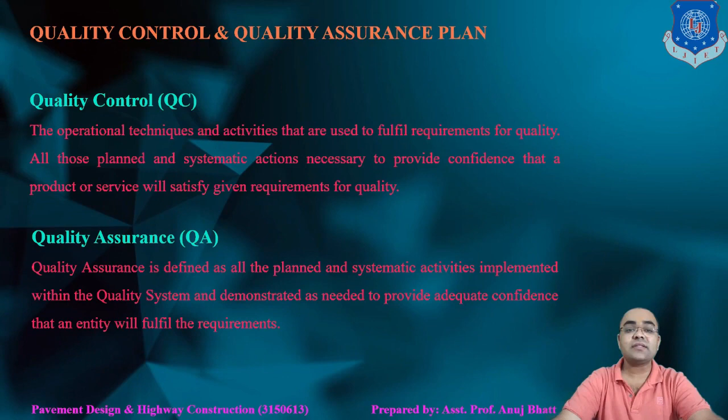Now next we will discuss what is a quality assurance plan. The quality assurance plan is the methodology selected for ensuring that the project incorporates all the elements needed for the successful design, construction and maintenance of a project.

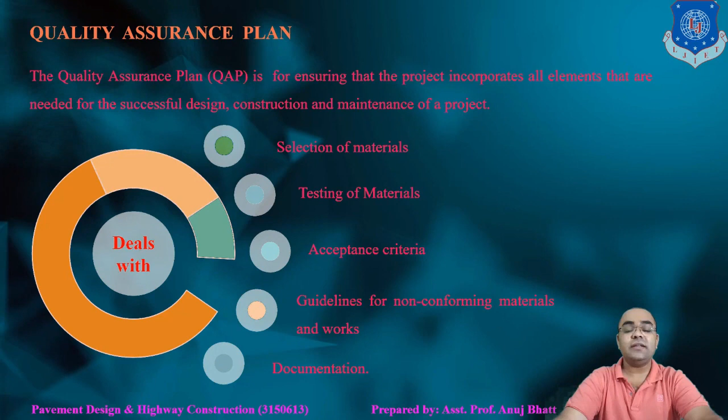The quality assurance plan should deal with the following aspects: selection of material, testing of material, acceptance criteria, guidelines for non-conforming material and works, and lastly, documentation. So let's start with the selection of material, or we can say the sampling of material.

The selection of the material: all construction materials to be used in the permanent works are to be sampled jointly by the consultant and the contractor, prior to the commencement of work. This includes sampling of materials to be tested for proposing approval of the material source, as well as sampling of material for approval of individual construction materials.

In both cases, the contractor must give notification of a request for such sampling to the consultant in advance, and for the sampling activities the consultant is to be represented by the material engineer. All sampling is to be carried out in accordance with instructions given by the consultant, and sampling procedures are to be followed as per recognized guidelines for the particular construction work.

Now these steps, when selecting the materials, include the following: first, the sample obtained has to be from at least 3 different areas. The second thing is ensuring that the sampled material and the location are typical for the material to be tested.

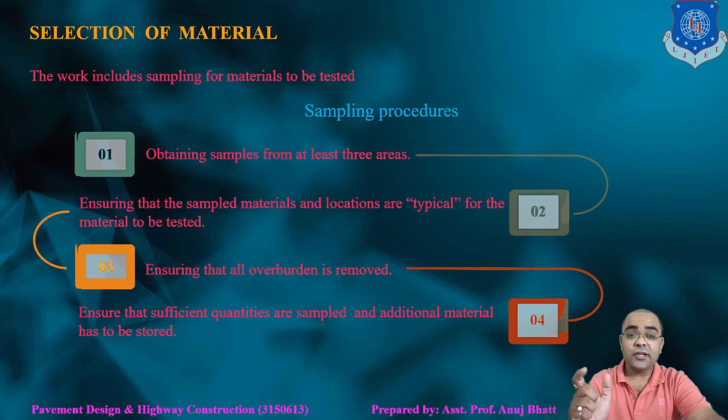The fourth point is that sufficient quantities are sampled to enable all tests to be conducted, plus additional material stored for subsequent testing if necessary. This point ensures that the engineer secures sufficient quantities sampled for that particular work.

Next, the engineer has to ensure that each sample bag is marked or labeled both inside and outside, giving the sample number, material type, sample location, date and number of the bag, as well as any additional information instructed by the engineer. The label has to be kept so the engineer can recognize which material has which characteristics.

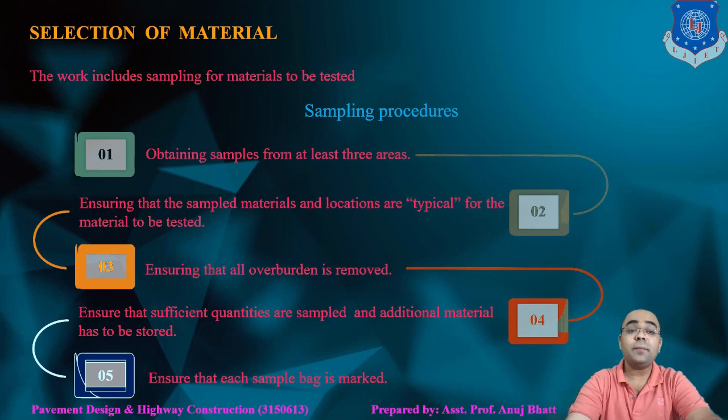So these are the steps to be kept while sampling or selecting the particular material. The next step is testing of material.

It is the responsibility of the contractor to ensure that the laboratory is properly protected at all times of the day and night. It has to be daily cleaned and properly maintained.

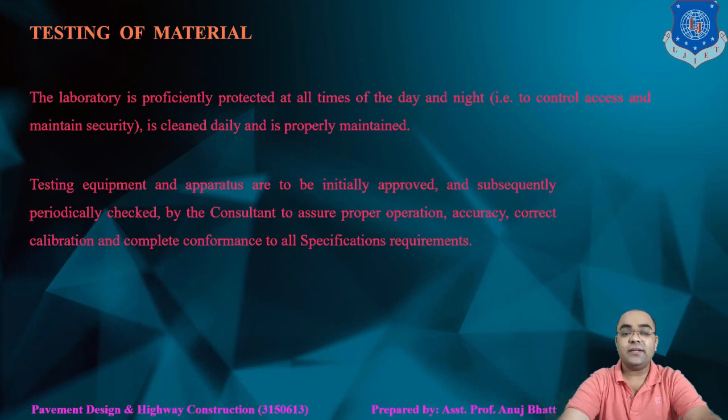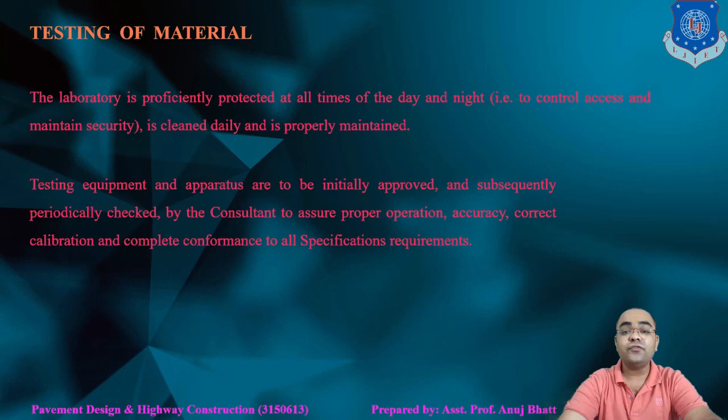The testing equipment and apparatus are to be initially approved and subsequently periodically checked by the consultant to assure proper operation, accuracy, correct calibration and complete conformance to all specification requirements.

The consultant is to supervise, monitor and check all aspects of the testing procedure, including sample storage, preparation, testing, analysis and reporting of testing results. So this is all about the testing of materials.

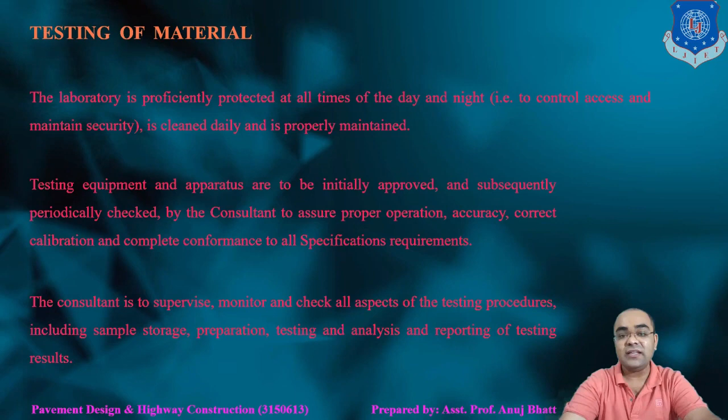The next step is acceptance criteria. After selecting the material, the engineer has to test that particular material, and then some acceptance criteria has to be followed. In the acceptance criteria, all materials included in the construction works for which quality control tests are specified, and for which approval by the engineer has been previously given, are to be inspected and checked for acceptability in accordance with the specification requirements.

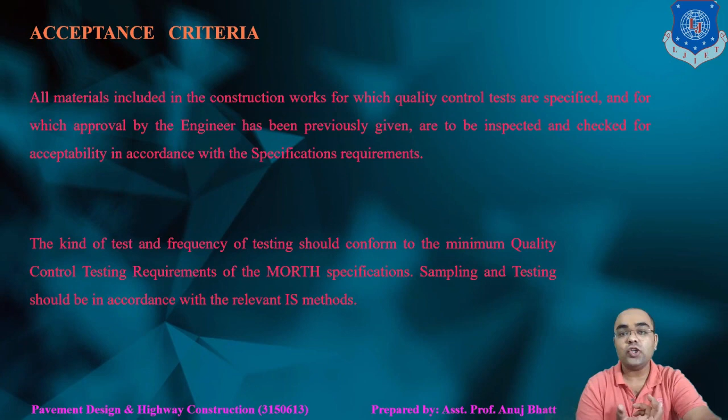The kind of tests and frequency of testing should conform to the minimum quality control testing requirements of the MORTH specification. Sampling and testing should be in accordance with the relevant IS methods. This term, acceptance criteria, indicates how much testing you have to perform on a particular material, which tests to perform, and what should be the criteria for those tests, as per IS methods and MORTH specifications.

The next topic is guidelines for non-conforming material and works. It is necessary that materials and workmanship conform with the contract requirements, and ideally non-conforming work shall be rejected. Whenever the work falls short of the requirement, the matter shall also be brought to the notice of the employer.

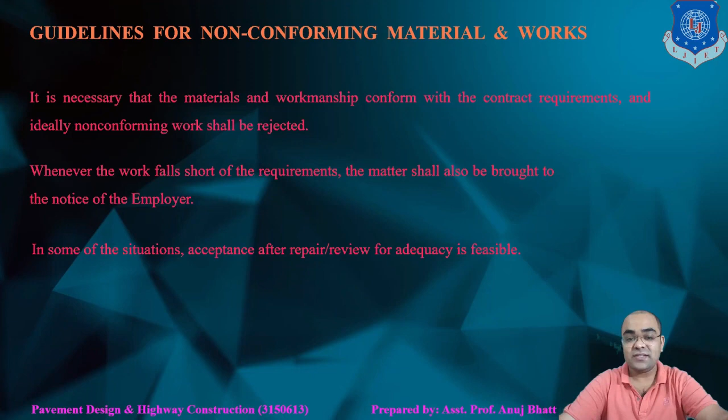But in some special cases, such as concrete, the non-conformance may only be known after a few days of test results. In such cases, the work has already progressed further, so acceptance after repair, or review for adequacy, is feasible. Therefore, separate procedures are laid out for some non-conforming situations.

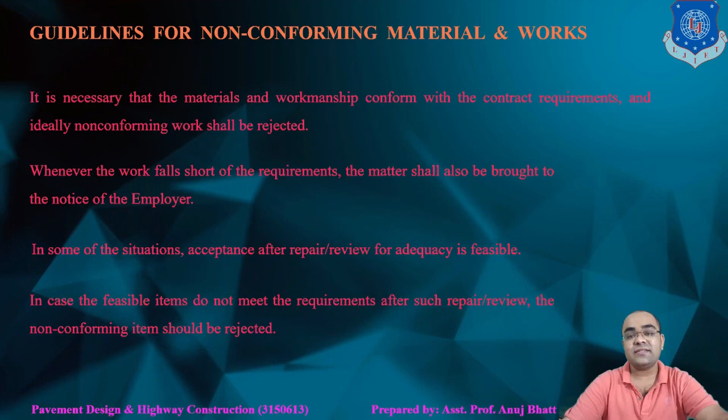In case the feasible items do not meet the requirements after such repair or review, or maintenance work, the non-conforming item should be rejected. It is also necessary to refer to head office or the designer in certain cases of non-conformance to seek their advice and guidance. After following all this procedure...

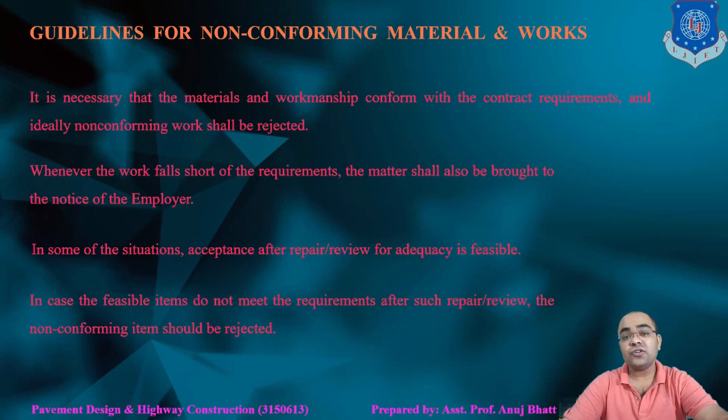Next, the site engineer, or supervisor, has to submit documentation of the particular project. Upon completion of each contract section, several documents have to be prepared and submitted to the employer. The following should be checked with the employer as the project nears completion.

The first things are the as-built drawings, the final takeoff quantities and amounts, contract documentation, and the final completion reports. Although these final documents are to be submitted at the end of the contract section, they have to be prepared as work progresses and finalized as the work nears the completion point.

So this is all about the quality assurance plan. To complete the project as per the required quality, such a plan has to be performed. Now, the next topic we will discuss is bituminous volumetrics.

The properties of bituminous mix include the theoretical specific gravity, the bulk specific gravity of the bituminous mix, the percent of air voids, the percentage volume of bitumen, the percentage voids in mineral aggregate, and the percentage voids filled with bituminous binder material. These are the terminologies from the bituminous volumetrics concept.

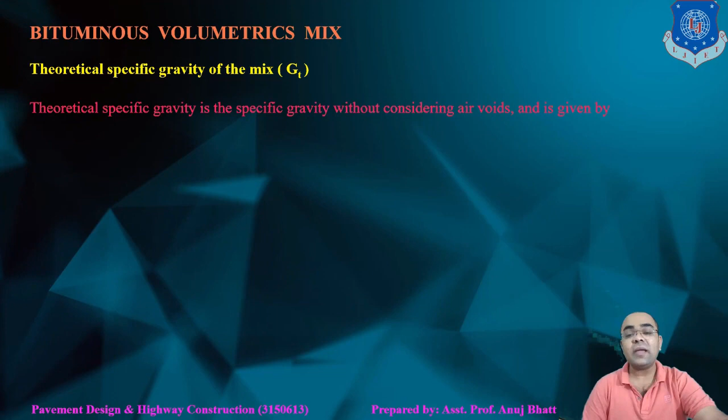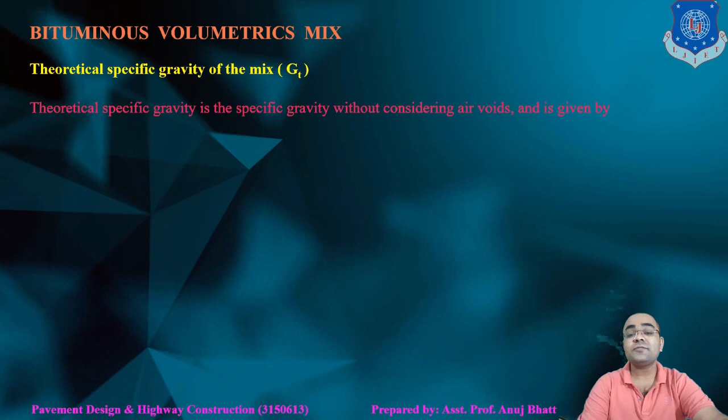Let's first discuss the theoretical specific gravity of the mix. The theoretical maximum specific gravity of a mixture is the specific gravity excluding the air voids. Thus, theoretically, if all the air voids were eliminated from the mixed sample, the combined specific gravity of the remaining aggregate and bituminous binder would be the theoretical maximum specific gravity.

The theoretical specific gravity is given by the equation: GT, the notation for theoretical specific gravity, equals W1 plus W2 plus W3 plus W4, all divided by W1 upon G1 plus W2 upon G2 plus W3 upon G3 plus W4 upon G4, wherein W4 and G4 are also notified as WB and GB.

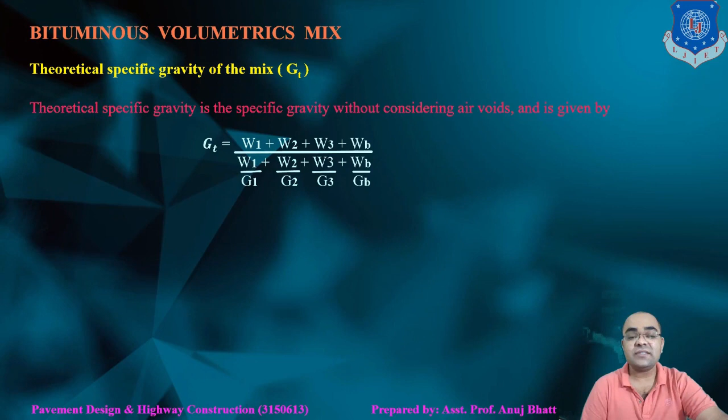Now what does all this terminology mean? Here, W1 is the weight of coarse aggregate in the total mix. W2 is the weight of fine aggregate in the total mix. W3 is the weight of filler in the total mix, and WB or W4 is the weight of bitumen in the total mix. Above all are aggregate and mix weights, and this last one is particularly for bitumen. So W stands for weight, where G stands for the specific gravity of that particular material.

G1 is the apparent specific gravity of the coarse aggregate, G2 is the same for fine aggregates, G3 is the apparent specific gravity of the filler, and G4 or GB is the apparent specific gravity of the bitumen binder. So this is all about the theoretical specific gravity of the mix.

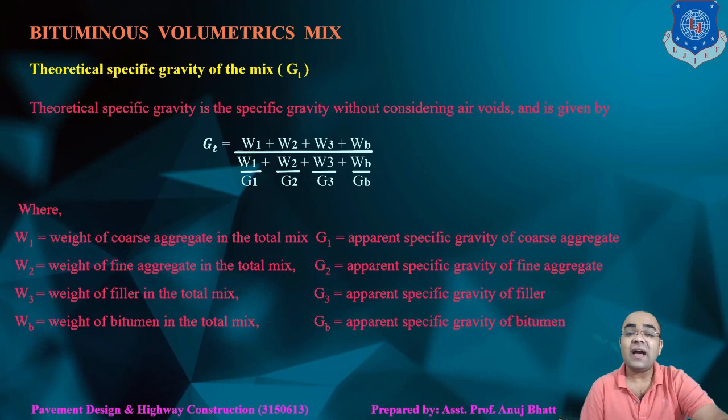The next terminology is the bulk specific gravity of the compacted asphalt, or the bulk specific gravity of the particular mix, notified as GM. It is the ratio of the mass in air of a unit volume of a permeable material at a stated temperature to the mass in air of an equal volume of water at a particular stated temperature.

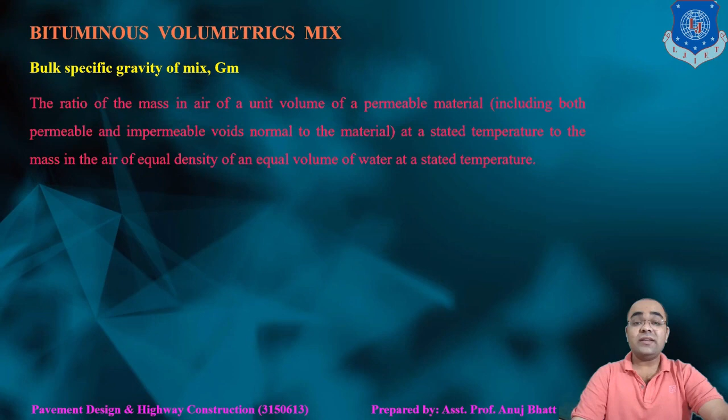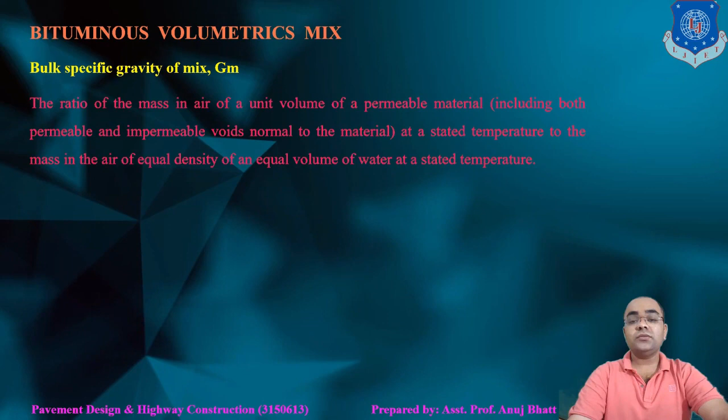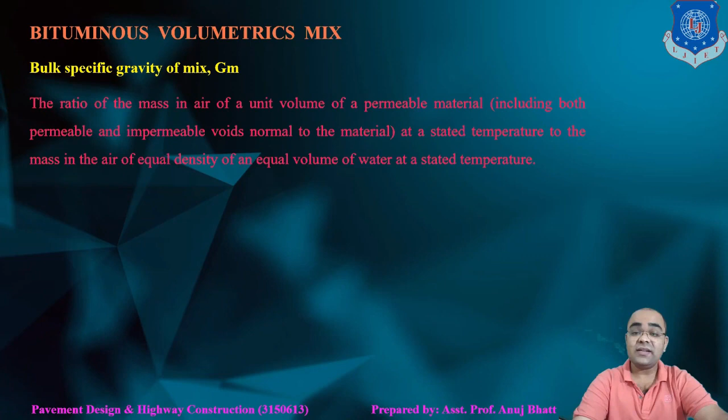This value is used to determine the weight per unit volume of the compacted mixture. It is very important to measure the bulk specific gravity as accurately as possible, since it is used to convert weight measurements to volumes. Any small error in this terminology, bulk specific gravity, will be reflected in significant volume errors which may go undetected.

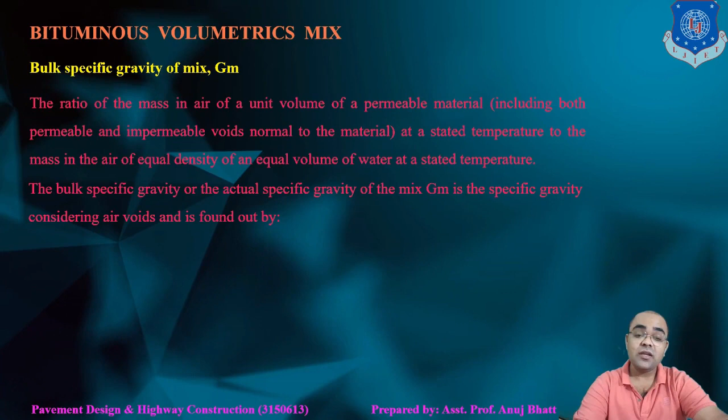Now the bulk specific gravity, or the actual specific gravity of the mix, can be found out by the following equation: Gm equals Wm upon Wm minus Ww, wherein Wm is the weight of the mix in air, while Ww is the weight of the mix in water. Note that Wm minus Ww gives the volume of the particular mix.

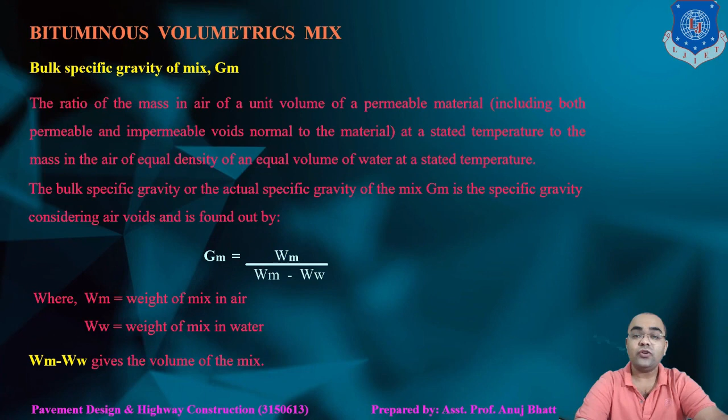The next is air void percentage, or the percentage of air voids: the total volume of small pockets of air between coated aggregate particles throughout a compacted paving mixture, expressed as a percentage of the bulk volume of the compacted paving mixture.

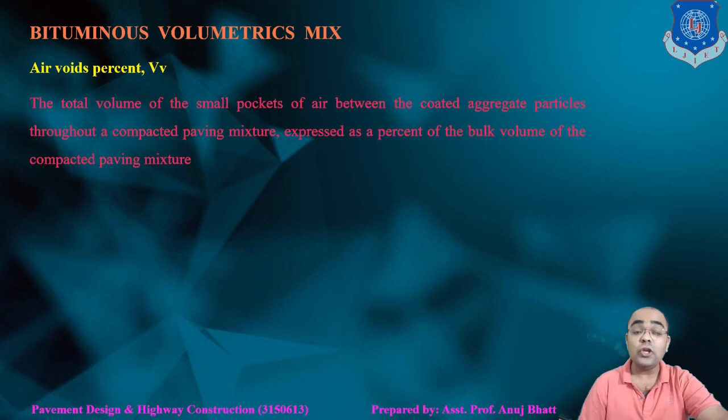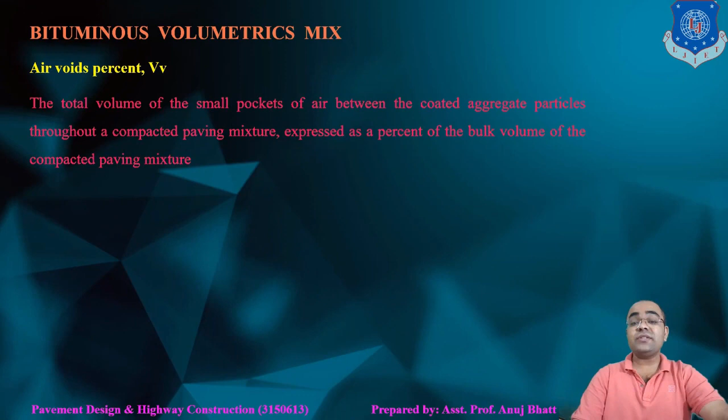The amount of air voids in a mixture is extremely important and closely related to stability and durability. For typical dense graded mixes with 12.5 mm nominal maximum size aggregate, air voids below about 3% result in an unstable mixture, while air voids above 8% result in a water permeable mixture.

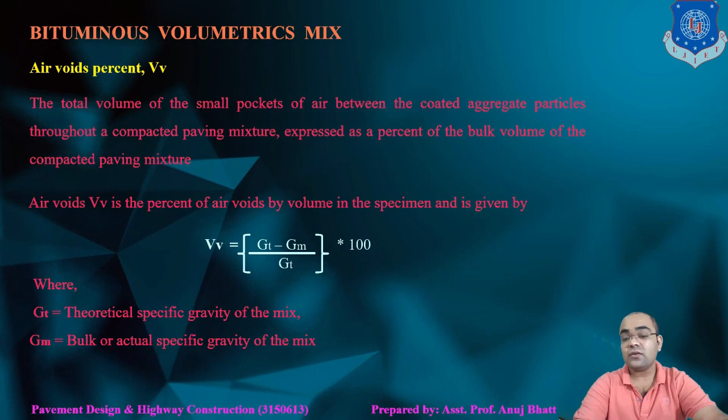Air voids by volume can be expressed as VV equals GT minus GM upon GT, into 100. GT is the theoretical specific gravity of the mix and GM is the bulk specific gravity of the mix. We have already discussed both these terms above, and we have the equations and formulas to find them.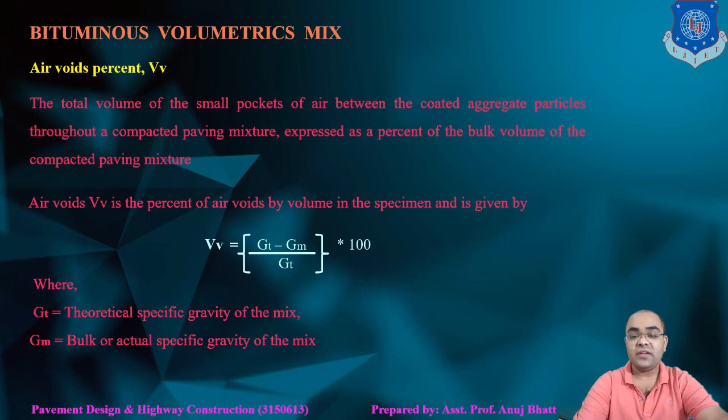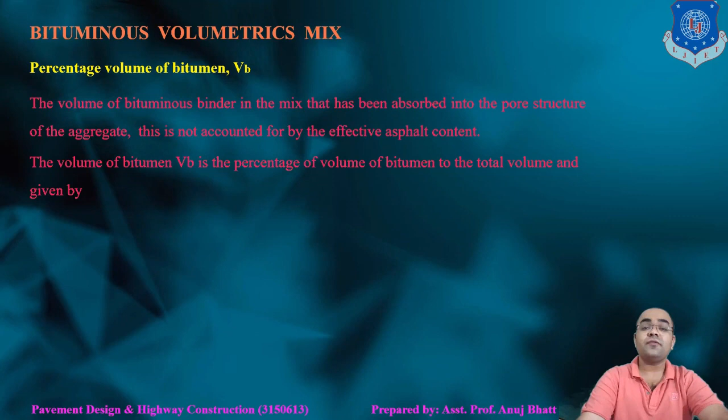The next terminology is percentage volume of bitumen, notified as VB. The volume of bituminous binder in the mix that has been absorbed into the pore structure of the aggregate is not accounted for in the effective asphalt content. The volume of bitumen is the percentage of volume of bitumen to the total volume.

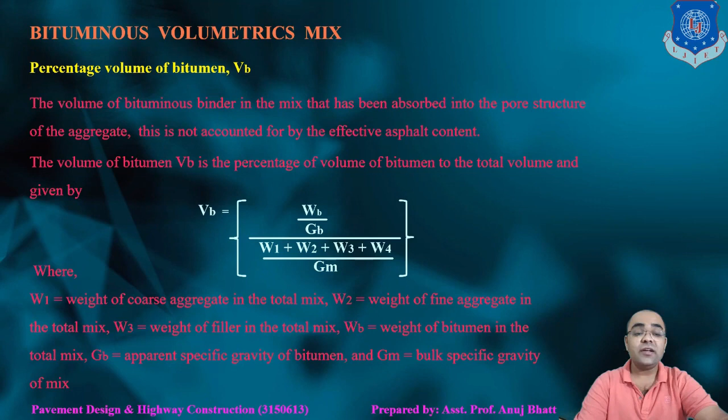It can be expressed as VB equals WB upon GB, specifically for the binder, since here we are talking about the volume of bitumen. So we take WB and GB, this whole divided by W1, W2, W3 plus W4, the weight of the bituminous binder, upon Gm. Now Gm is the bulk specific gravity of the mix, W1, W2, W3 are the different weights of aggregates and fillers, and Gb is the specific gravity of the bitumen binder.

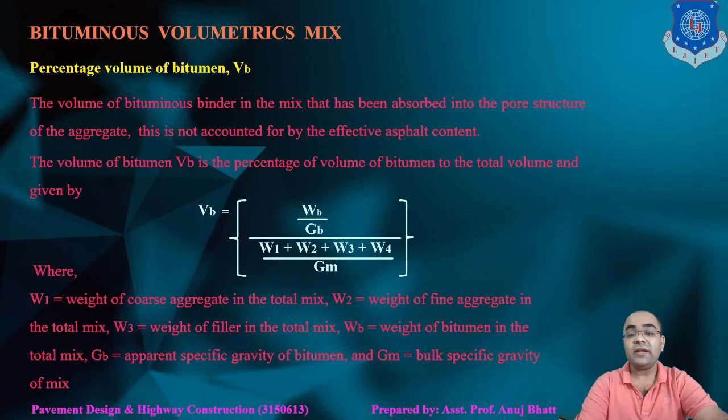Next is void in mineral aggregates, that is VMA. This is the volume of the intergranular void space between the aggregate particles of a compacted paving mixture, which includes the air voids and the effective asphalt content, expressed as a percent of the total volume of the specimen.

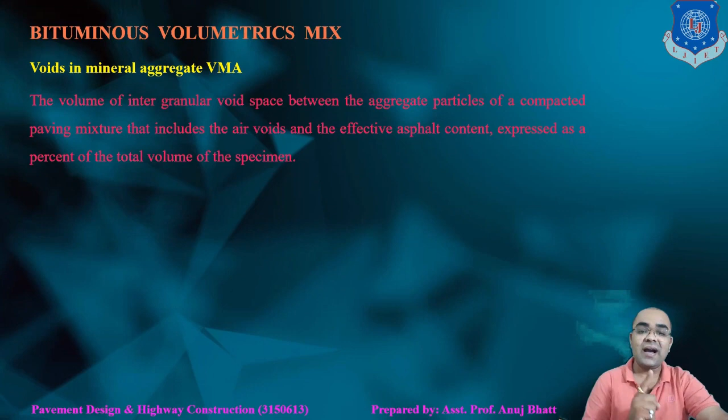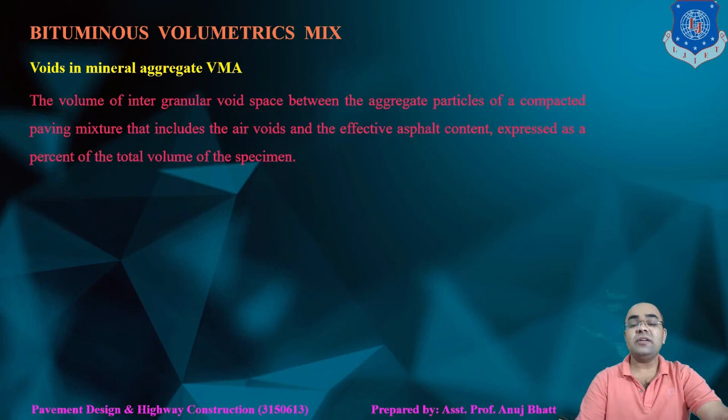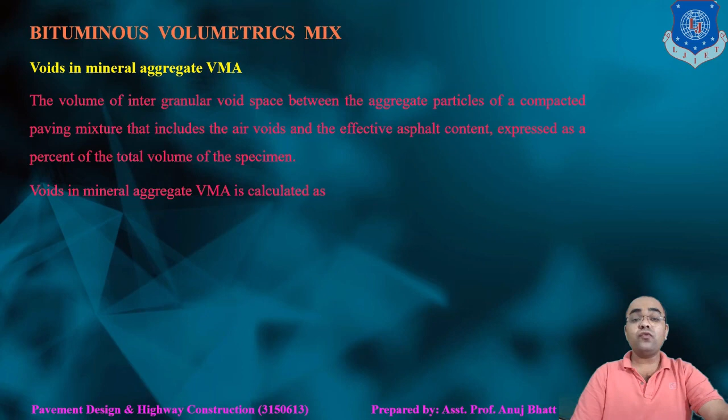When VMA is too low, there is not enough room in the mixture to add sufficient asphalt, and if the VMA is excessive, that will cause unacceptably low mixture stability. So generally a minimum void in mineral aggregate is specified, and a maximum may or may not be specified. Void in mineral aggregate can be calculated as VV plus VB.

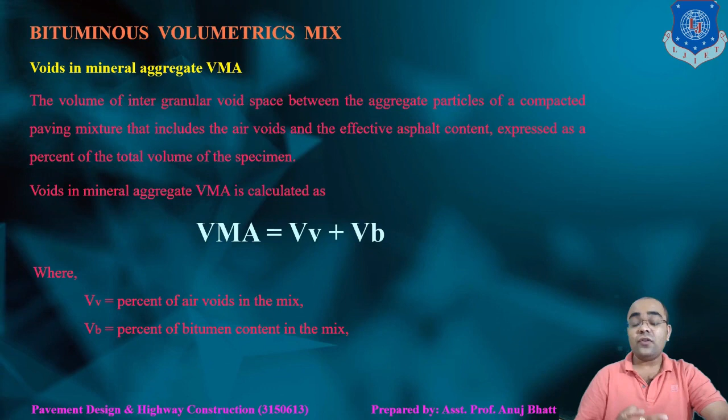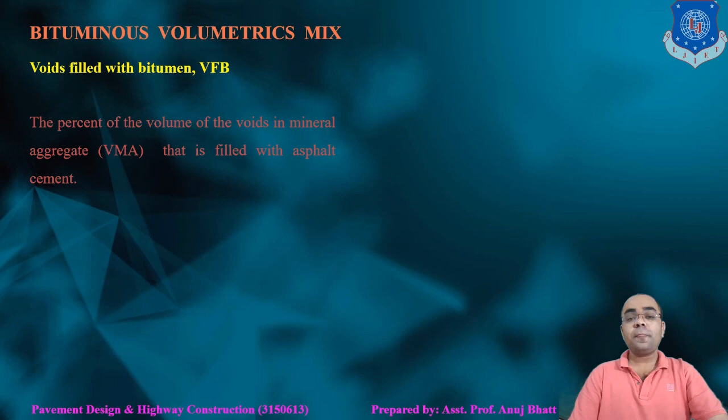So it is the addition of percentage of air voids in the mix and the percentage of bituminous content in the mix. Now let's talk about voids filled with bitumen, VFB: the portion of the voids in the mineral aggregate that contain asphalt binder. This represents the volume of the effective asphalt content.

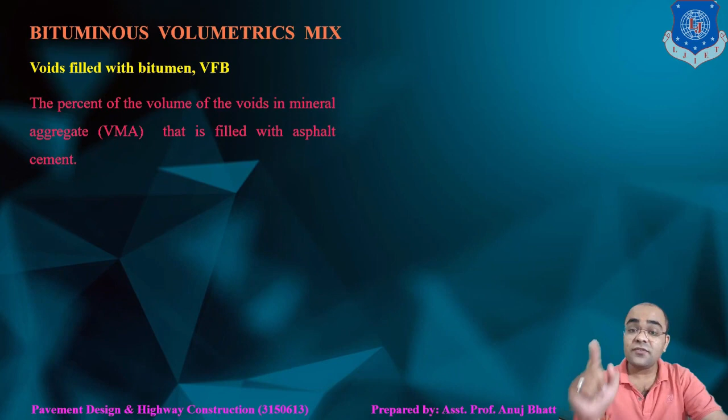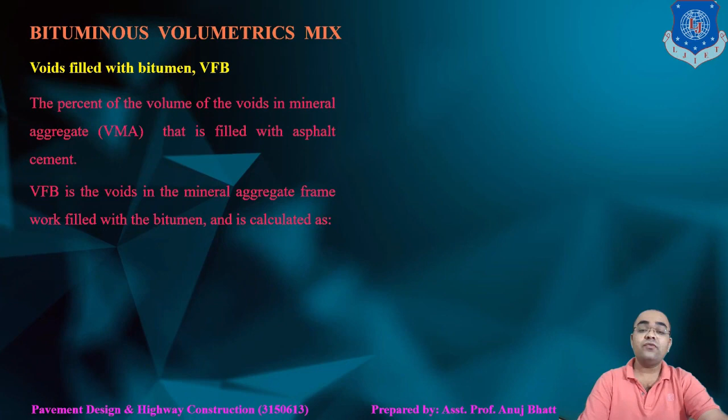It can also be described as the percent of the volume of the voids in mineral aggregates, VMA, that is filled with asphalt cement. Voids filled with bitumen is inversely related to air voids: as air voids decrease, the VFB value increases. VFB can be calculated as VB into 100 upon void in mineral aggregate.

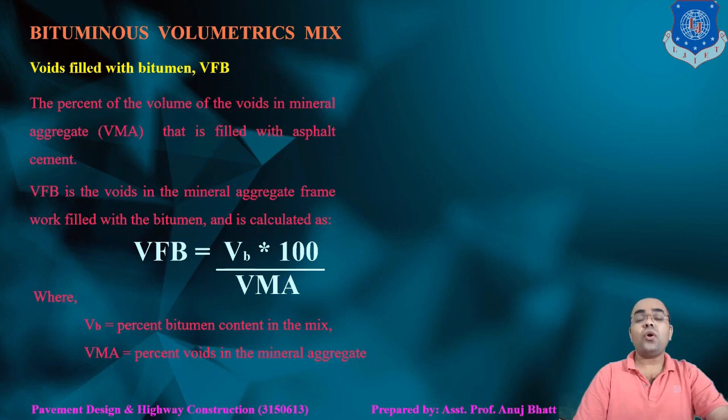We have the formula for void in mineral aggregate, and we also know how to find the value of VB, the percentage of bitumen content in the mix. So this is all about bituminous volumetrics.

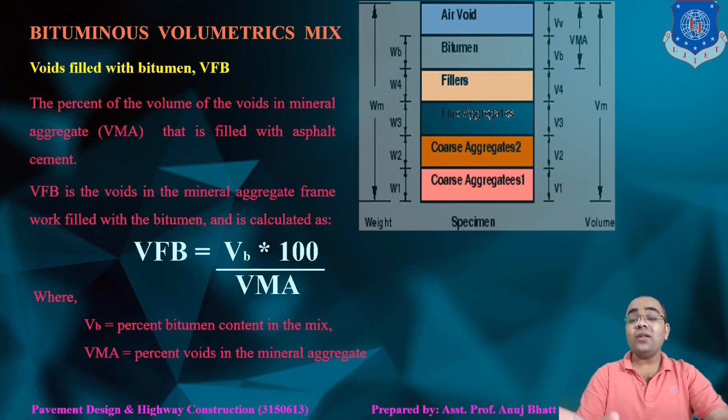This is a chart for a particular specimen to understand all these bituminous volumetrics.